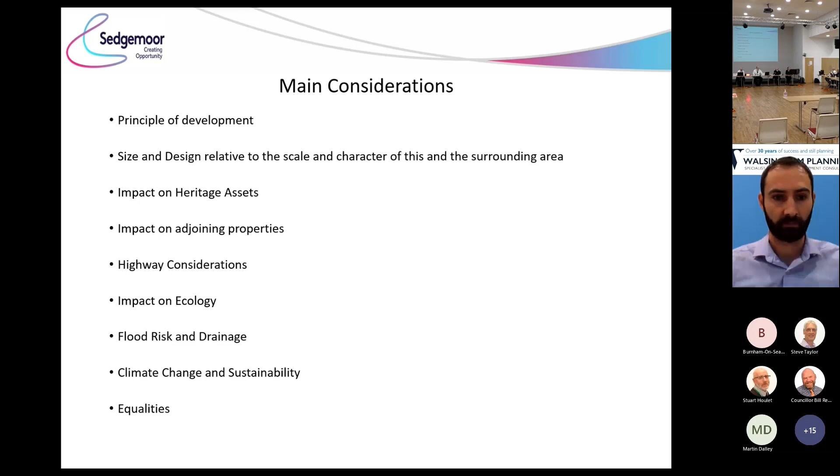So this slide shows the site outlined in red. It lies to the south of the existing primary school on New Road, to the east of Main Road, with New Road to the north and Main Road to the west. The site is located outside of, but adjoining, the settlement boundary for West Huntspill, which it adjoins on the north and west boundaries, and it is seeking consent for exceptional release through policy T3A of the local plan. So it's an outline application for up to 45 dwellings.

So this shows a Google Maps image of the site, which is square and level and clearly defined with hedged boundaries. There's also land drains surrounding the site and a bus stop on Main Road and a mile marker to the south of the existing bus stop, which is currently in the existing hedgerow.

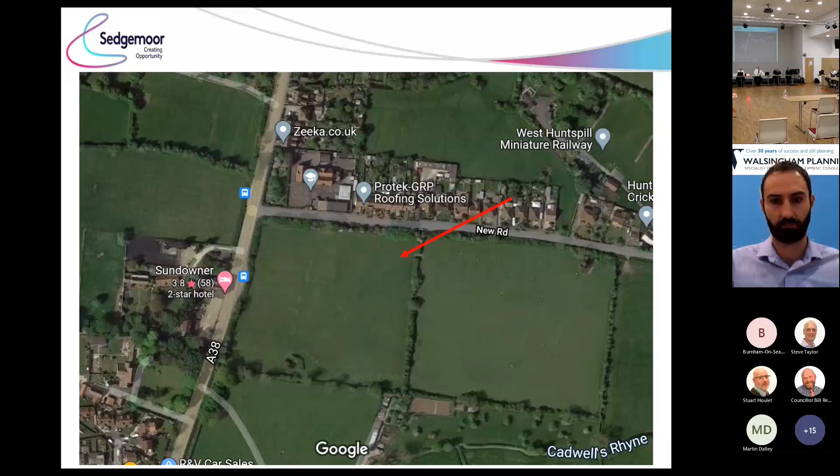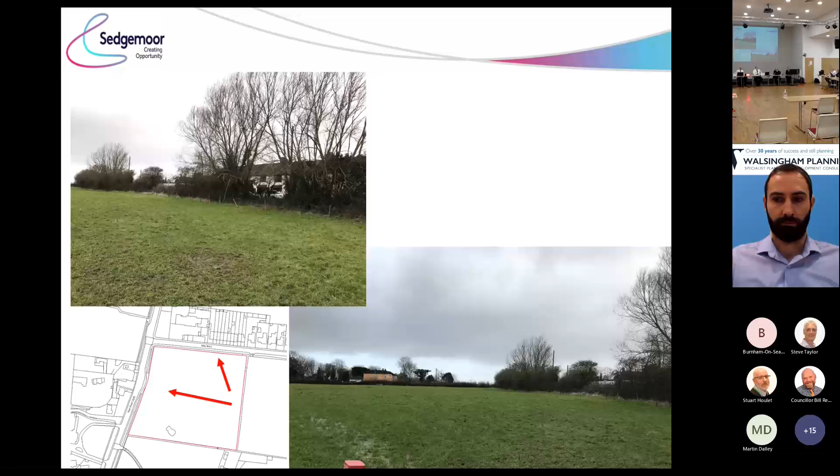So the next couple of slides show the site. The first image is from within the site looking northwest, with the existing screening to the boundary and properties on the opposite side of New Road visible through the hedge. The second image is a view through the site looking west, showing the elevation of Sundowner, which lies on the opposite side of Main Road.

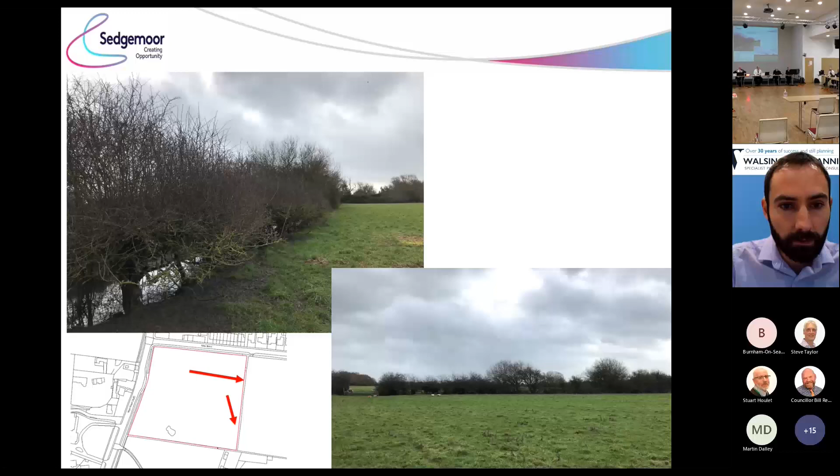These are views east and south from within the site, showing the level nature of the land and the established hedge boundaries to the site. The top image is a view to the southeast of the west boundary, and a view from within the site towards the west boundary with the existing field gate, which currently provides access for this land parcel.

This slide shows a view of the existing parking along New Road, looking west and then east, and the surrounding parking restrictions due to the location of the adjoining school.

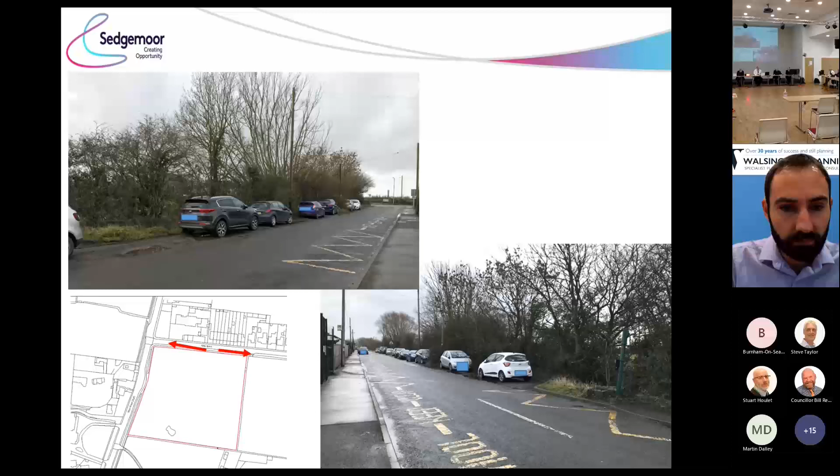As previously mentioned, the application is in outline and was supported with this illustrative layout. The only detailed matter for consideration is the access. This indicates there's a play space and a car park along the northern boundary. There's a pedestrian link into New Road at the top hand corner of the site, and maintained green boundaries and enhanced wildlife corridor along the southern boundary.

In principle and in accordance with policy T3A and S2 of the local plan, this site is looking to meet an identified local housing need for affordable housing, identified as part of a housing needs assessment for West Huntspill. In October 2019, the West Huntspill Housing Needs Assessment was produced and published, although this was subsequently updated in September 2020. Whilst the Parish Council have raised concern regarding the update, the Affordable Housing team have confirmed that the update was undertaken following a robust methodology and resulted in a housing affordable need for 18 households.

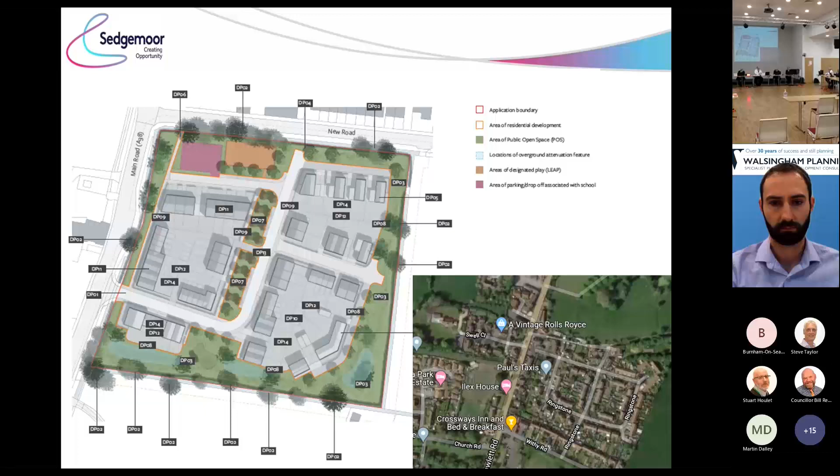Policy T3A, this is the criteria for the policy, which is also set out in the report, but for reasons set out in the previous slide, there's no objection in principle to the development of this land. The Parish Council have raised concern in terms of design quality and lack of reference to the recent NPPF changes, but as an outline application, the detailed design of the development would be subject to further applications and additional supporting information would be required at that stage.

The connectivity I will cover as part of the highway considerations. The siting of the affordable housing would be secured through the legal agreement and set as part of future applications. The Economic Development team have also recommended a condition requiring a local labour agreement, and due to the position of the site relative to the primary school, the developer also sets out the position of wider support for employment as a result of the development at this site.

There are a number of highway improvements proposed as part of the application, and the illustrative plan and the design principles plan set out green buffers to the boundaries. The creation of the access in the location proposed would also result in the opening up of the surrounding area around the mile marker.

This is a photo of the existing mile marker, which is currently located within the hedge on the western boundary of the site. It was not readily visible at the time I carried out my site visit. The bus stop is shown on the section adjoining the photo and shows the location of the access point. The milestone marker would remain on an area of green adjoining and to the south of the main access, and would fall within the visibility splay. That would result in the surrounding land around the mile marker being cleared to ensure visibility, increasing the prominence of this heritage asset. In terms of heritage impact, the development is not looking to move or relocate the marker, although the development would result in a change to its setting.

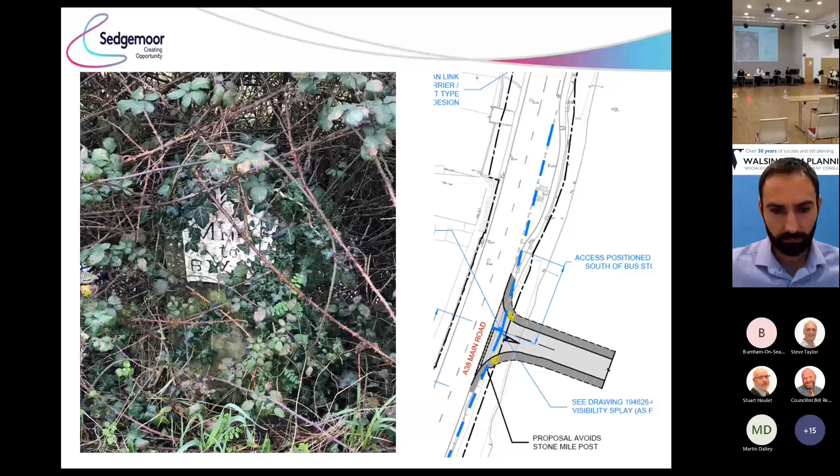Turning to impact on neighbours, there are residential properties adjoining the site to the north and west, with agricultural land to the east and south, and the school immediately to the north. The layout plans are only indicative because the details are set as part of future applications, but it does show landscape boundaries retained and a landscape buffer. The car park and play area would increase separation between the proposed development and the school, and the dwellings to the east, orientated to New Road, show a good degree of separation.

Properties are also shown fronting Main Road, although due to the orientation of Sundowner and the intervening highway, there's not considered to be any undue impact. The detailed layout and design would be subject to further applications, but there are no constraints that would suggest that the development would give rise to any undue impact.

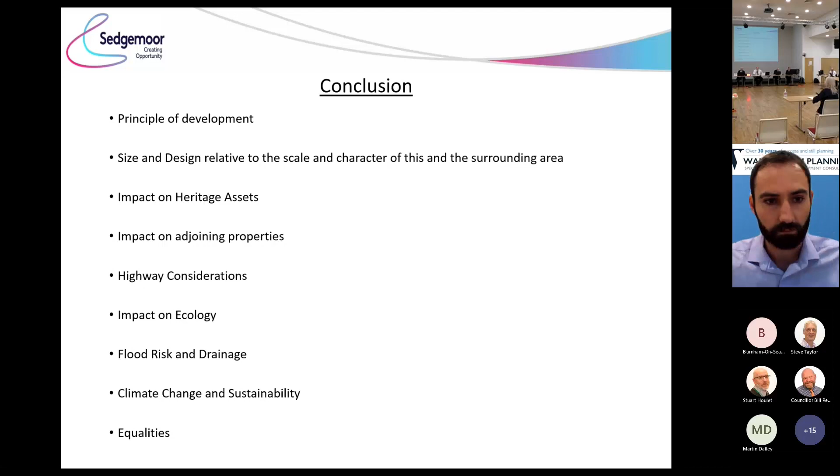I have lived in the village for the majority of my life, and I live at 5 New Road, and this development is totally out of keeping with the surroundings. I would like to say that we feel our democratic rights have been eroded by COVID restrictions. The majority of residents did not receive a consultation letter or any communication and are unaware of the development. However, 65 plus letters were submitted to the planning department.

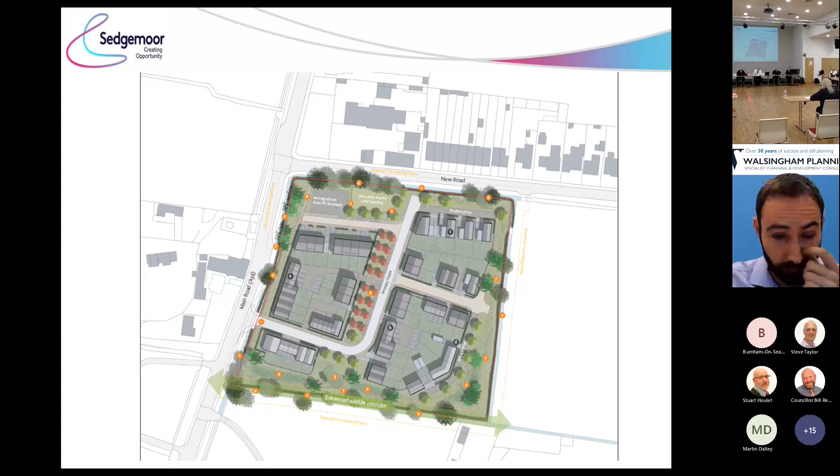Finally, there has been no consultation by Walsingham with us as claimed. Outline planning application was only received by the Parish Council on the 14th of January 2021, which has allowed the public just one Parish Council meeting on the 8th of February to discuss it. They have not worked closely with residents - paragraph 28 of NPPF - and finally, Sedgemoor local policy for Tier 3 housing has not been adhered to, as a meaningful and robust engagement with the local community and other stakeholders has not taken place. Thank you very much.

Ask councillors here and there, have they read our letters that we submitted? I'm sorry, I can't allow you to carry on. You've had the 3 minutes that you're permitted, but thank you.

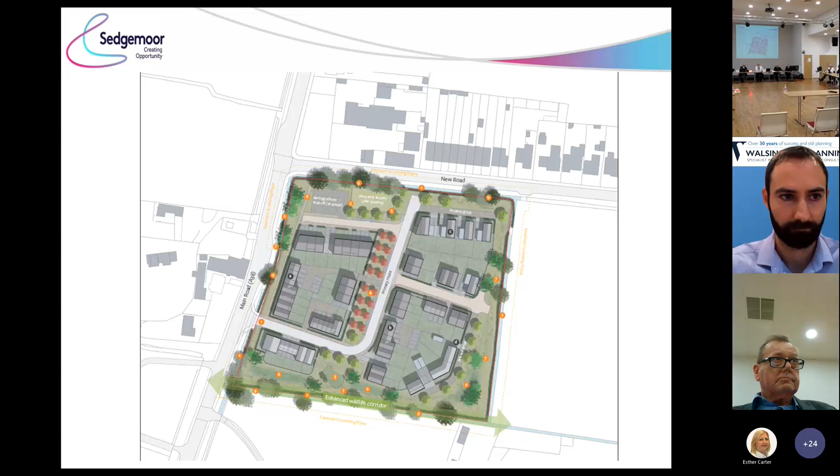Hi, Mr. Chick, I'm going to ask you to start, but give it 5 seconds before you do, just because we need to turn some mics off first. If you could count yourself to 5 and then start, we'll let you know if that works. Okay. Hi, Stuart.

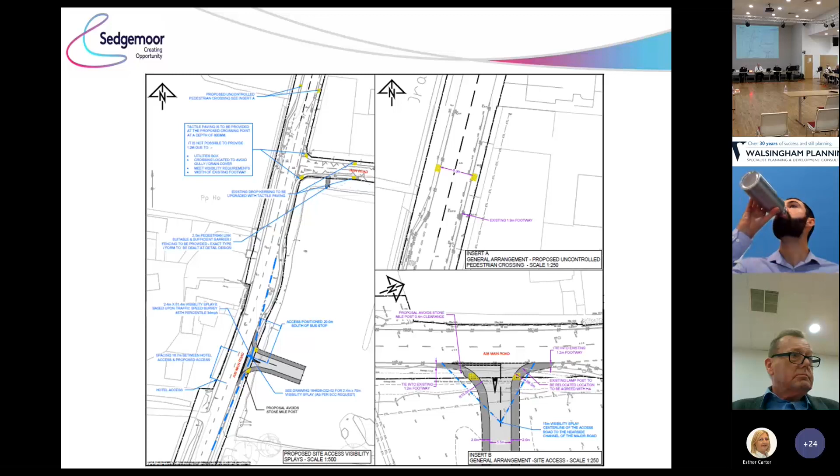It's quite difficult, and I'm very surprised that you have allowed this slightly enlarged development with only one access through to the A38, so that everybody has to come in through that road, with traffic and congestion problems for them to cope with. Personally, I am diametrically opposed to any large development—or this is a medium development, but in terms of West Huntspill, it's a large development. They're quite right in what they said. It's quite a large development.

I'm really surprised that you've allowed it right along the road, right next to the road. I would have thought this should be further inland, away from the road, so that it becomes something independent, with an independent access to New Road, for example.

Is it New Road? Is it New Road?

I am also disturbed about the fact that you are having traffic drive every morning and every night through, disturbing the peace of these people. This is not a peaceful development. People who will be getting houses on this development are walking straight into a problem, with traffic that has a right to come through their so-called peaceful development. I've had it described as an advantage, but I don't think it's an advantage at all. I think it's in the wrong position, and in some respects overbearing to the village.

One of the speakers said this is mainly a single and small housing development. If you drive along this road, you see lots of single houses tucked away nicely as part of a ribbon development. This village is a ribbon development, not somewhere you clump large amounts like this. Personally, I will be voting against this because I think it's in the wrong place. You could say it's overbearing to the road - it's hardly overbearing in terms of size, but for a large development like this, it's in the wrong place. It's misplaced.

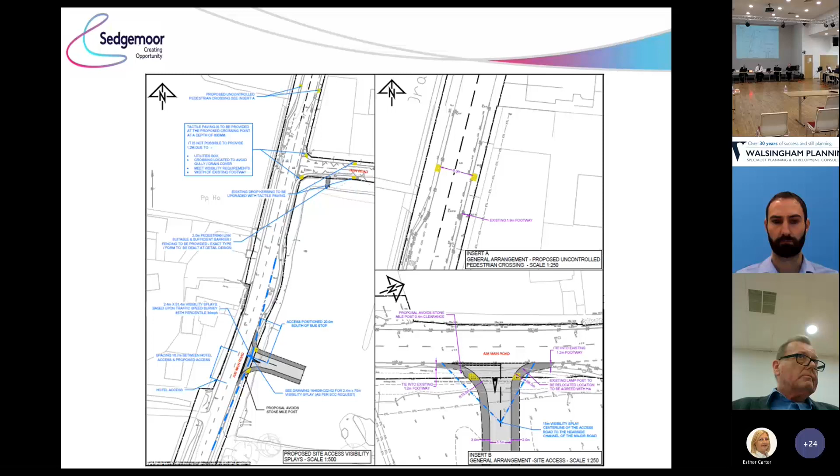And where would the crossing patrol be operating - on the A38 or New Road? The primary school currently operate a pedestrian crossing on the new road section, but that's run by the primary school because of the school. So it's not something that's provided by this development.

Okay, thank you. Councillor Pearce? Not yet, I'll try again. Can you hear me now? No. Not sure, I think we got you then. All right, okay, thank you.

These applications, I think, always place us in a difficult position because it meets policy requirements, it ticks boxes, and it includes affordable housing. And we all want to see more affordable housing, but I do have some concerns about this one.

I would like some more detail on the form of the affordable housing, what form that will take, how we define that. In terms of Tier 3 settlements, our policy 5.172 says that it's generally expected that such schemes will be community-led. The speakers today have not implied that that is the case, so I would like to know exactly how the developer or the applicant has engaged with the community.

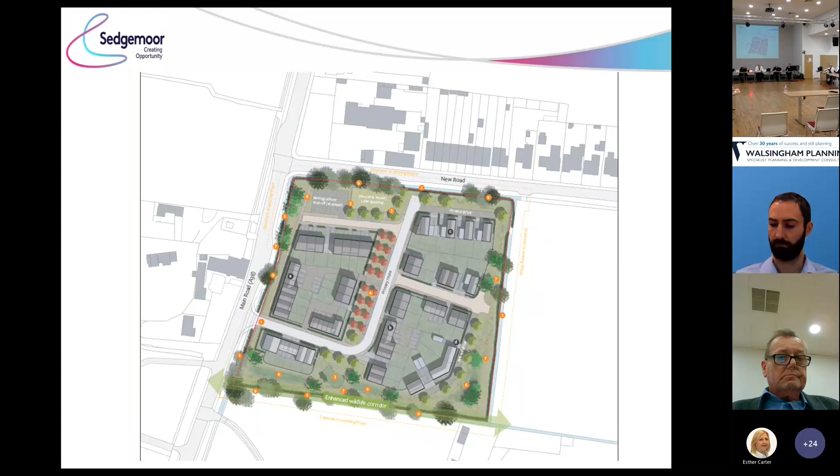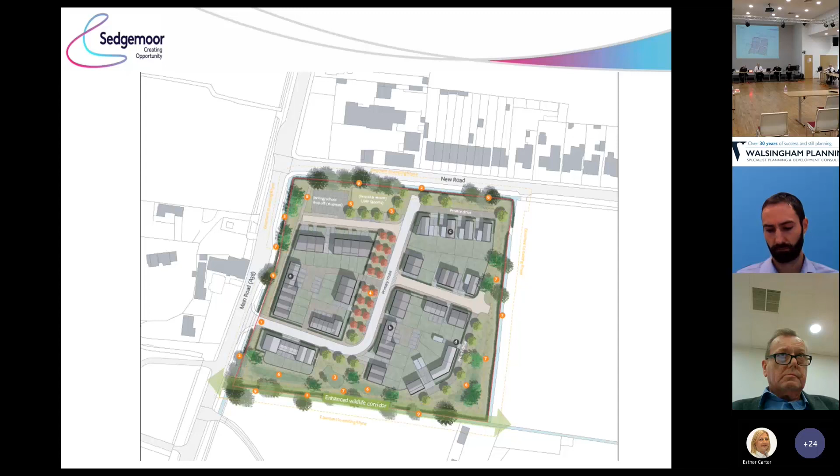It was alluded to by one of the speakers, but with no details, and there does seem to be a disparity there. I am concerned about the fact that it's in flood zone 3A, and page 54 of the report states that the ground here has poor drainage, and I'm not sure that building them half a metre higher than the ground level really addresses the flood risk problem for the surrounding area, other than the development itself. So I do have concerns about this, and although we want to see affordable housing, I'm not sure that it's at any price. Thank you.

Mrs. De Vries? Thank you.

In terms of community consultation, the site was subject to pre-application advice, and they did consult at pre-application stage with the parish council. You heard from the agent this morning there was also a leaflet drop, although how extensive that was and how far it went, I'm not sure. As part of the planning application, there was a site notice posted on site, and the residential properties immediately adjoining the site would have received a neighbour notification letter. So that's the engagement as part of the application.

In terms of flood zone 3, because it's meeting a locally identified need for West Huntspill, the search area for other sites at lower flood risk is West Huntspill or the immediate surrounding area. All of the immediate surrounding area is also flood zone 3, so there's no area at less risk than this site.

In terms of drainage, the reference was because the lead local flood authority normally encourages more sustainable drainage systems for infiltration, but because the site is surrounded by land drains, they're penned at a set level in accordance with the IDB. So the likelihood of acceptable infiltration rates is slim, which is where the drainage comment came in, because it's unlikely that they would drain it in the way the LLFA would originally want, but they accept that argument in principle. So there are alternative ways to drain it, but slightly less sustainable. That was because of the surrounding land drains rather than the flood risk.

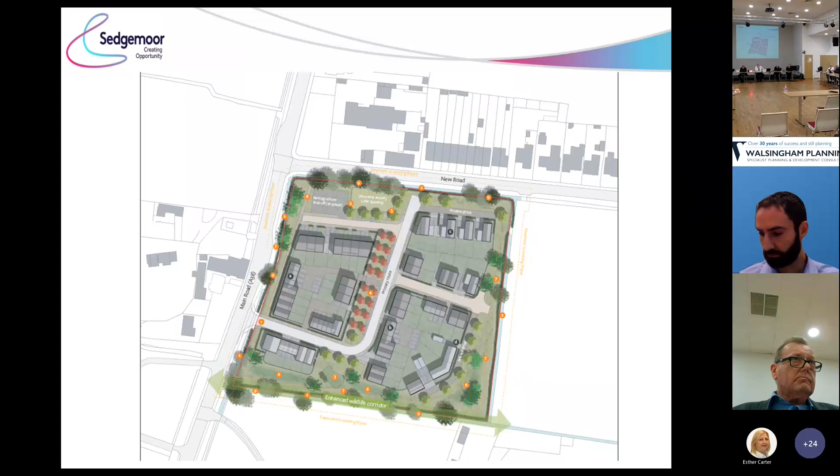Well, I suppose the housing needs survey is only a snapshot in time, isn't it, in 2020? So it wouldn't have had that updated information. But of course, as I said, there were 50 people originally in 2020 identified on the Home Finder Somerset list, of which, when they've done the targeted interviews on the phone and emails, other people have come forward. It doesn't mean that those people who still haven't come forward aren't in need. So with these things, it is always a snapshot in time.

The one thing we all know, because we have this discussion on these applications all the time, is once need is established and built, the need goes up. People will bring themselves forward to say, actually, we are in housing need. So the need goes up, it doesn't go down. There isn't a magic bullet for this issue in terms of it being part of the housing crisis. So housing need will go up. The housing needs survey is meant to be a piece of evidence to underpin an application going forward. It's a snapshot in time.

The figures that the housing need assessment at that time was identifying was 18. This application comes in and fulfills that. If there's movement around the margins of that, I don't know, I haven't got that information to hand. But there will always be a bit of a buffer in this because housing need is out there and is usually above the levels the survey identifies. So I think it's a safe and robust position, and one that we've taken at Wedmore, Woolavington recently, on all those other schemes. So we're being consistent.

I think it's probably a bit unfortunate that it was called a light touch housing needs assessment, because if it'd been called targeted, it would have been seen as something a bit more robust. But that's what it was, a targeted exercise. Possibly a learning point would be it would have been helpful to have had that housing needs assessment there so that we could read it rather than read the officer's comment on the housing needs. Looking at primary evidence is always more helpful than looking at secondary evidence.

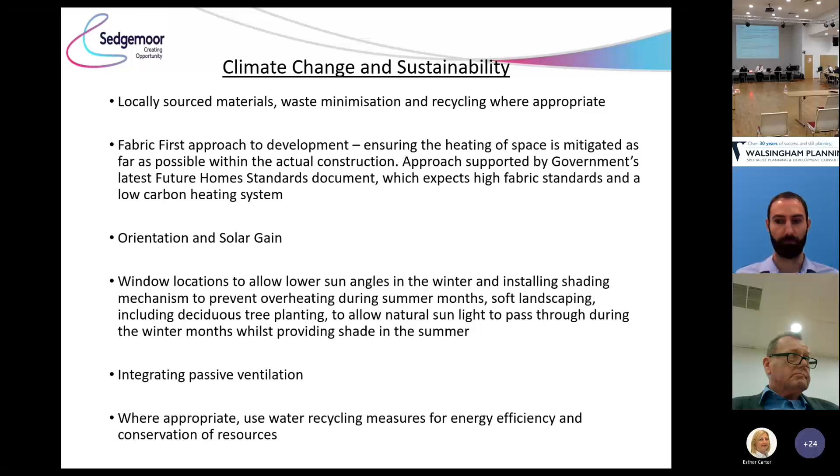Going back to the crossing thing, a tactile crossing isn't an officially recognised road crossing. There's no requirement for a car to stop with somebody waiting at the pavement. That's why I was concerned when they were saying a crossing on the A38 - which I think is a good thing for a development like this - has got to have some sort of control on it.

With regards to county education, they've said school places generated. I'm not sure of the age group of that adjacent school, but is there sufficient places in that school to accommodate them, or are we going to have people having to travel to other schools? Bearing in mind we've got probably over 1,000 houses at least being built in that immediate vicinity.

Currently, we haven't got any objection from education in terms of capacity. We're happy that there is currently spaces available, but they rerun the figures in terms of what capacity they've got almost annually and calculate it on an annual basis. At the moment, the comment we had back from county education doesn't suggest any capacity issues.

So basically it's first come, first serve - whoever gets in first will get it. It isn't taking into account the whole picture of all the housing that's going to be there.

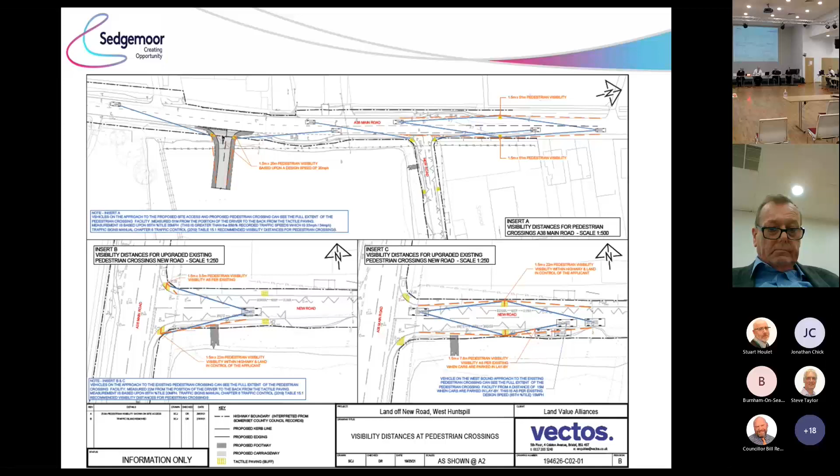In terms of accommodating additional spaces, the comment we get from county education does require contributions through the Community Infrastructure Levy. So there is a charge per school place which they will subsequently collect from the CIL pot - that's their comment outlining what contribution they would take from the development to accommodate any additional spaces if needed.

So there is sufficient room on the existing school site to actually put up further accommodation should that be needed. That's the comment we've got - we haven't got an objection on capacity.

There is, of course, the new school at Brue Farm. Yeah, that's part of that as well - that's what I was saying about the age groups. I'm not sure if one's at a lesser age group then goes up to the newer school, or whether the newer school is going to take on all the age groups. Both primary. Both primary. Thank you.

Yeah. Okay. Councillor Murphy, can you pass? Thanks.

It's just a question on clarification. I was very interested to see when you wrote about solar gain, it mentions a shading mechanism - what is that? It'll be subject to detailed design, but it could be like an overhang of a window, so you don't get the direct glare of the sunshine. So you've no detail of that? No, it's an outline application at this stage - there's no detail of any of that.

Thank you very much. Just I don't want to hold things up. Okay.

Any further comments or questions from members? At the moment then I have a proposal, which was to grant permission with the amended condition 1 and the local lettings policy highlighted. Is that seconded? Councillor Kingham? Okay.

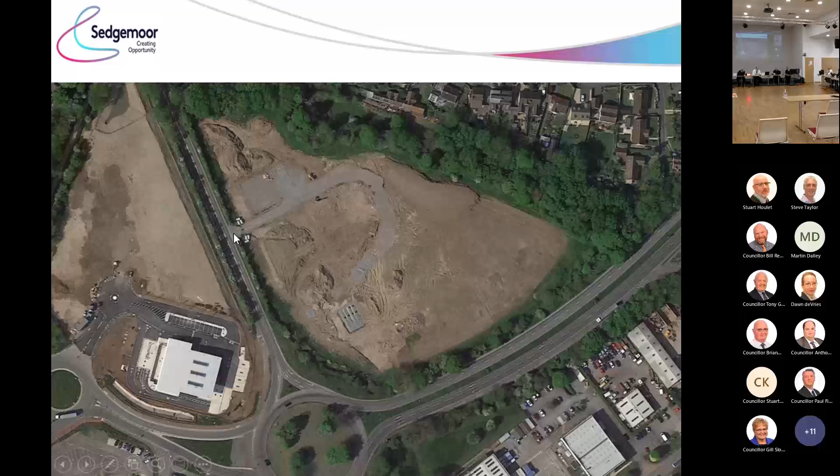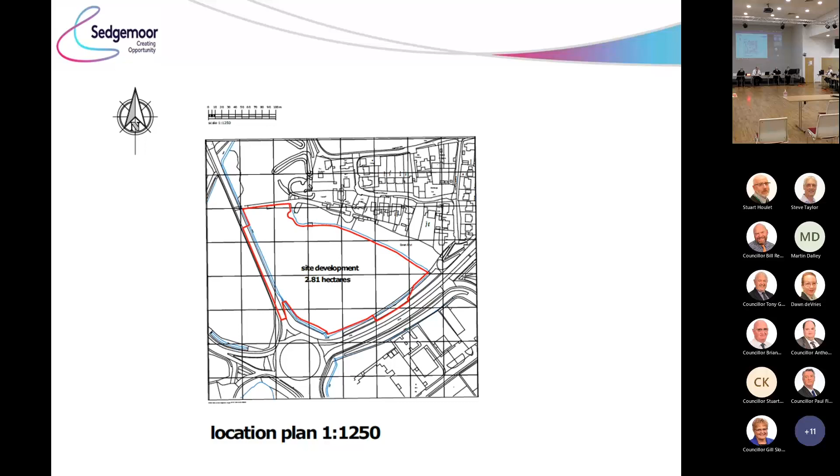You can see the A39 coming down the dual carriageway to the Dunball roundabout. A bit closer in, you can see the basic layout starting to take form, and the construction entrance in the position of the approved final entrance, operational during construction, based on the A38. The red line shows that it includes the development site as well as works on the A38 outside the site, and then, as you see here, just on the A38 line, the red line kicks out to show the entrance, where it would be as a slip road off the eastbound A38.

In terms of the mix, the detailed permission is on the southern part of the site, and on the northern part, the three little coloured shaded areas are the parts with outline permission installed. At this point, for that outline element, only the points of access are to be agreed now; the remainder will come with the reserved matters on that northern part of the site. We have all the details on the southern part of the site as well.

So in detail, we have the entrance on the left-hand side there from the A38 coming in through the site, with a spur off north to serve the outline. There is a development site just in here, just to the south of the entrance road, but that's not part of the detail today.

The area down the southern part of the site provides a petrol filling station on the western front, with the shop, the fueling area for cars to the south, and an HGV fueling area to the western end. There are some jet washes on the southern part of the site, and then two freestanding buildings that are built there - one is badged up as a Starbucks, the other as a Kentucky Fried Chicken.

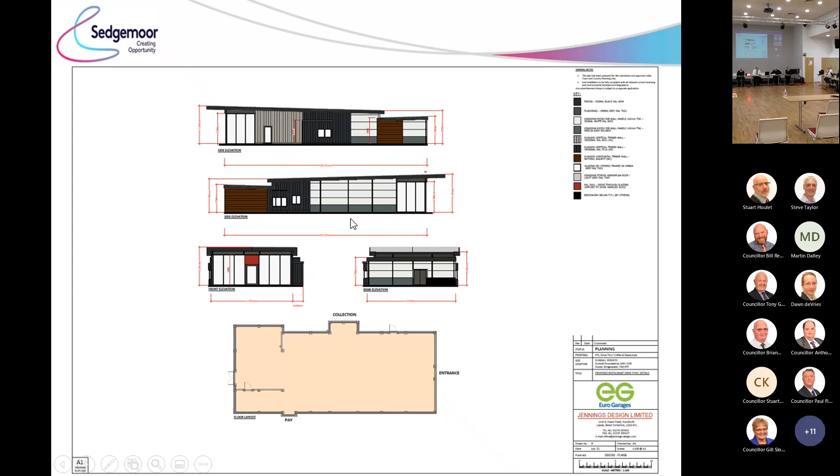Drive-through out there. And then the other takeaway - this is the one badged up as Kentucky Fried Chicken. The elevation you see from the A39, from the side, is essentially this middle one here.

Just reminding us of the layout, and moving on to some elevations in context - these are essentially read as a sequence of drawings looking north, starting with this area here, which is the HGV fueling area.

Moving on to the petrol filling station, and then as though you're viewing from the south, the side of the coffee outlet, and continuing on the next drawing down with the side of the other drive-through unit, Kentucky Fried Chicken. Then there's just a cross-section in the side, looking from the west through the site - so it's all single-story, relatively low buildings.

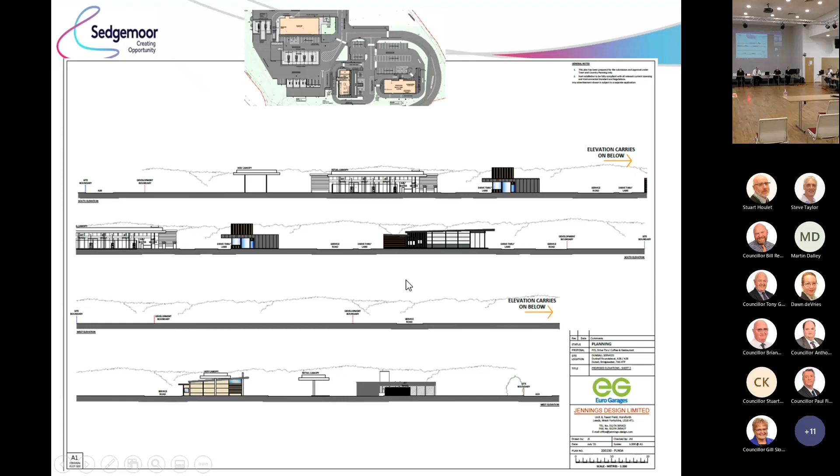And then the corresponding rear elevations from within the site, looking south, showing the backs of these buildings. In terms of internal arrangements, the whole site has been tracked for HGVs - all the vehicles likely to use it, including all the servicing and vehicles arriving at the petrol filling station to fuel up - and that's all been shown to work through the tracking drawing.

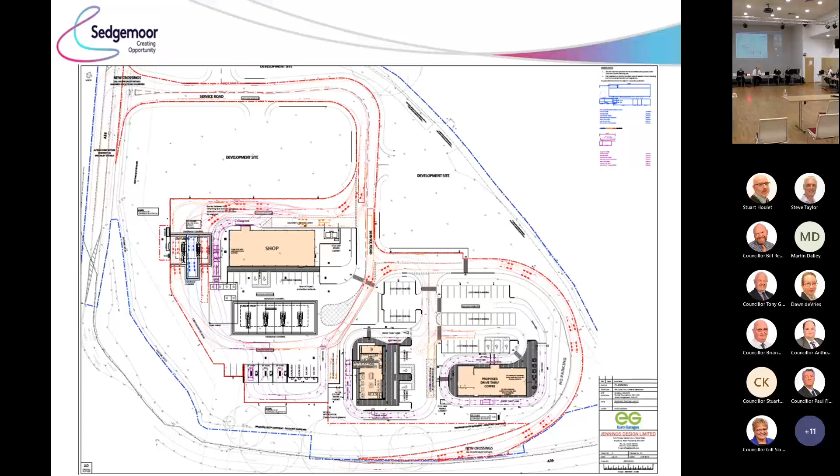This layout hasn't changed since the previous grant of permission. So we're only looking here at whether or not this layout would be safe to work without that A39 entrance at the bottom for the first 6 months - purely the first 6 months of this detailed permission.

Some site views of the site. This is from the A39 looking into the site, courtesy of Google Earth.

A couple of months ago here, you can see things under construction. You can see the frame of the canopy for the petrol filling station on the left-hand side, the side of the Starbucks building, and then behind the trees there, that will be the Kentucky Fried Chicken outlet.

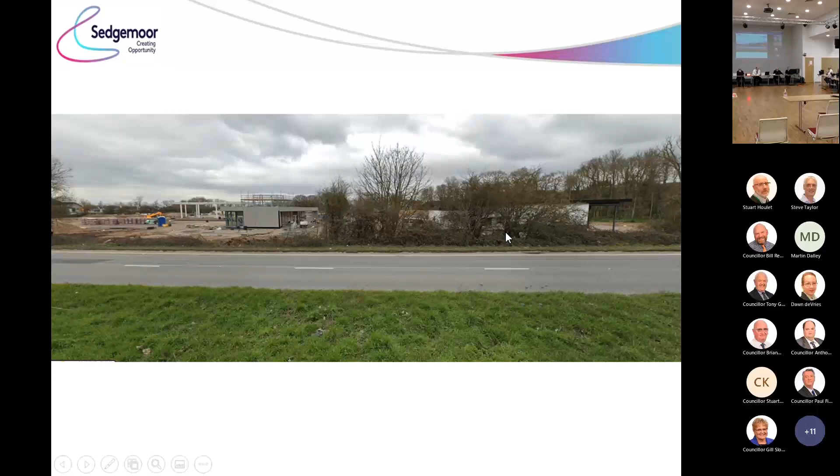From more up-to-date photographs, that is the site as we see today. It's essentially built out, but appears to have been mothballed. There was no one on site working when I went there yesterday.

They are having difficulties sorting out the access arrangements with county highways through their section 278 agreements. Those agreements would flow from the grant of permission if we are minded to approve this today, because they wait for the planning permission to be in place before they finalise the 278 agreements.

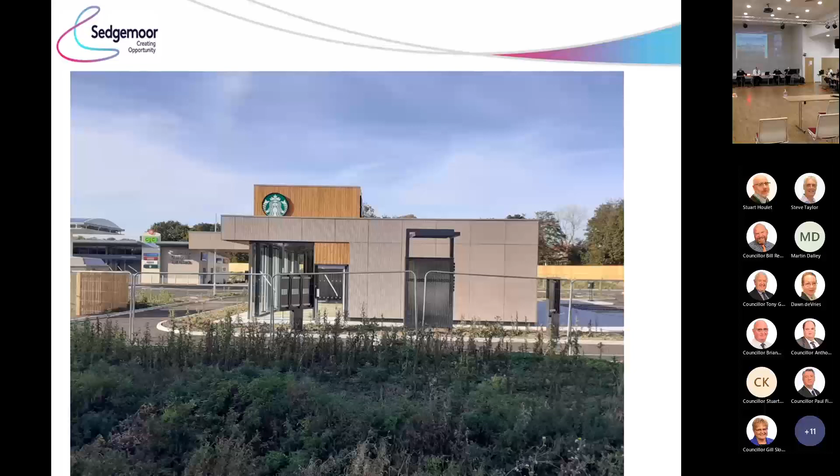Just panning the camera around, you can see it's all badged up, so we're pretty clear who the operators will be. And then there's the last building there.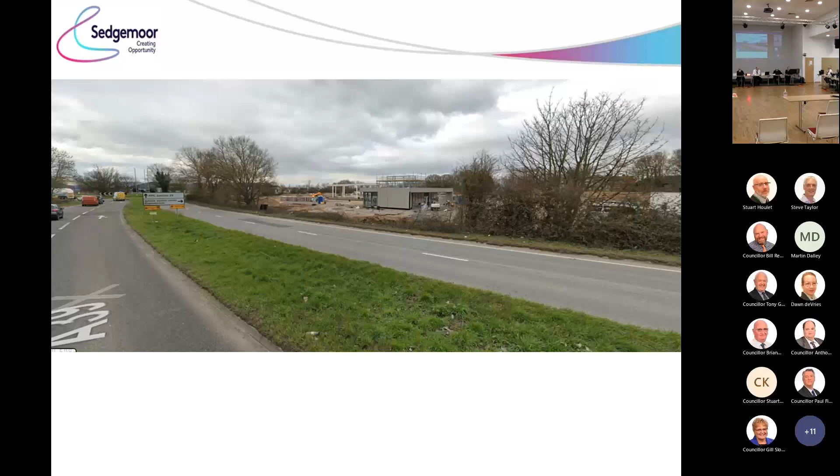Sweeping around the back of that building, and from the roundabout, looking at the site, most of the site boundary treatments have been retained. They've been thinned out a bit, but that is all part due to be retained. The boundary treatment planting around the site will be retained as part of this scheme.

Going up again, courtesy of the same source, during the construction phase that's the end of the A38, and that's how it is today. So you see the boundary treatments have largely survived.

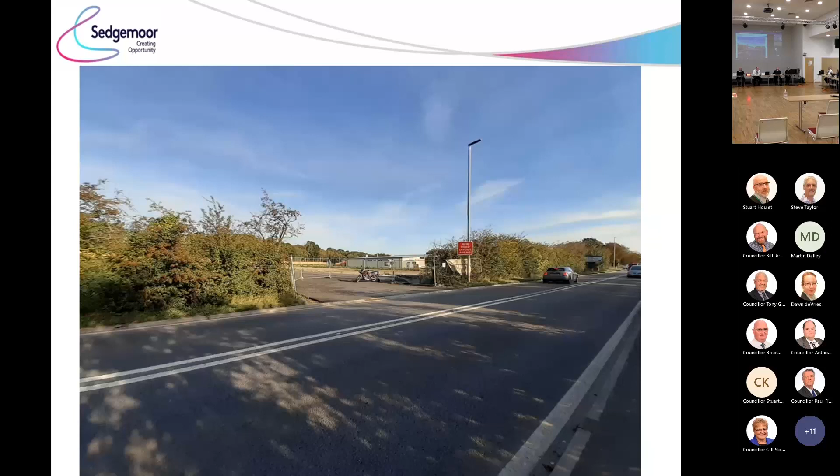There's really a structure immediately inside that, and that's according to the 278 agreement, bridging that. Then looking inside through that entrance, that will be the road taking you in, round up towards the back, round to the right, taking you to the petrol filling station area.

Left-hand side up would be the employment units. You can see the acoustic fence that has gone in at the back, that structure all the way along, visible all the way around that side of the site, to provide a degree of noise protection to the properties down there.

That has been done in accordance with details already agreed with the discharge conditions, and I bring those forward in my recommendation today. Just looking at the employment site again, to show that fence does go all the way around.

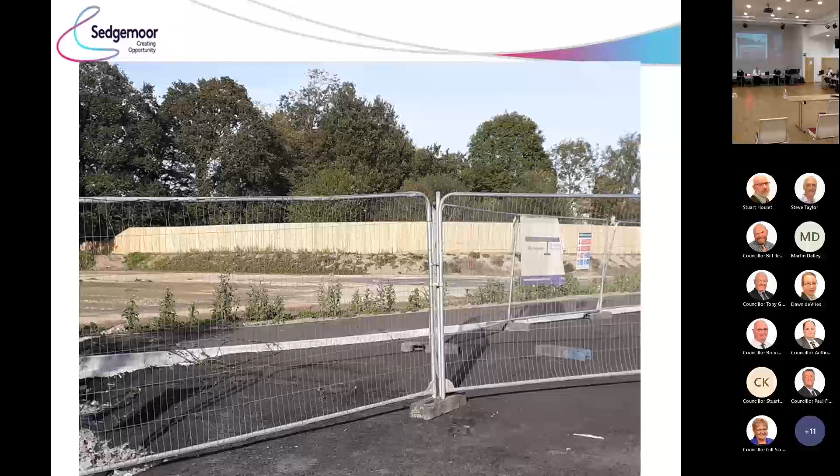Looking at the backs of the buildings, that's the back of the filling station building. You can see the little collection on the right-hand side, and then a bit more in context. That's the HGV filling bit.

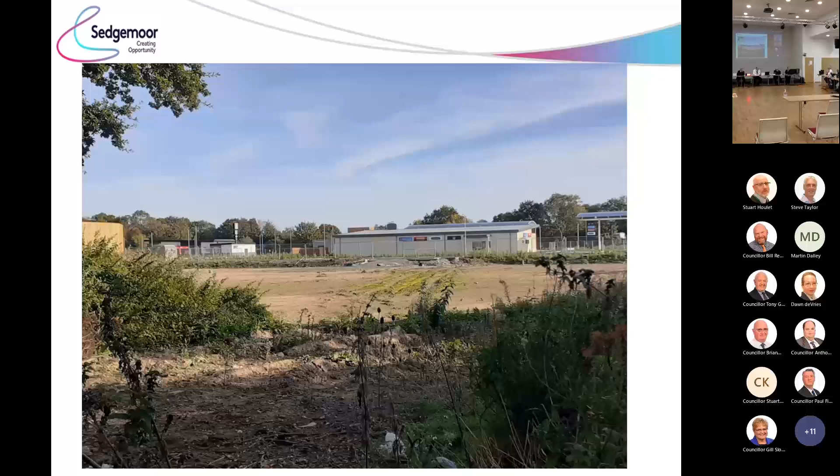Finally, right up in the corner, this is the road that comes out from down there onto the A38. I stepped inside there and took this photo, looking down from across the land down to this, looking at it in detail.

In terms of conditions, a couple of updates. Firstly, I've structured the permission to read as a full detailed permission. For the first part, conditions 1 to 23, it's a detailed permission that almost exists as a standalone in terms of condition discharge. Conditions 24 through to 47 are the elements that apply to outline.

I'd suggest we insert on the decision, in front of condition 24, just a heading to say these are conditions that relate to the outline. It does mean some duplication, but it means each condition only needs to be discharged once. Where conditions apply at both the full and outline level, you'd have to discharge the same condition twice, which can get confusing. I feel it's just easier to structure it like this.

In terms of condition 28, I've realised that the structure of that in the report would effectively allow the outline to operate for 6 months using just the A38. That is not the intention - the outline is always clear that it must be served by both entrances. So I'm suggesting we redraft 28 and set out the elements to make clear that the outline can only be served by both entrances.

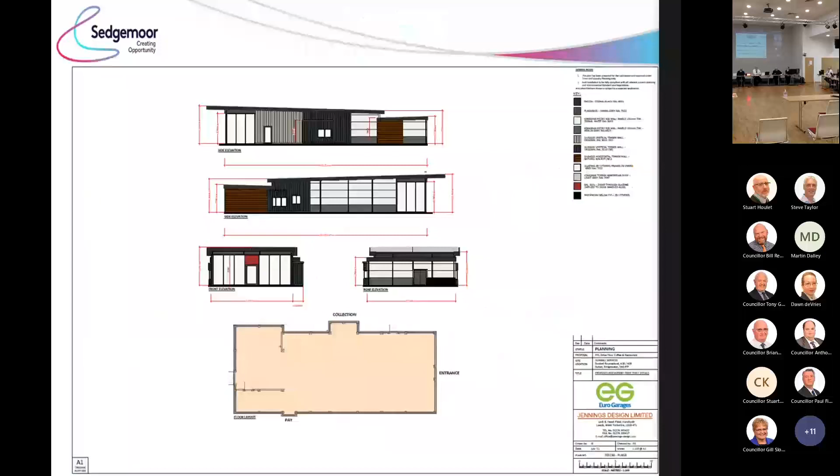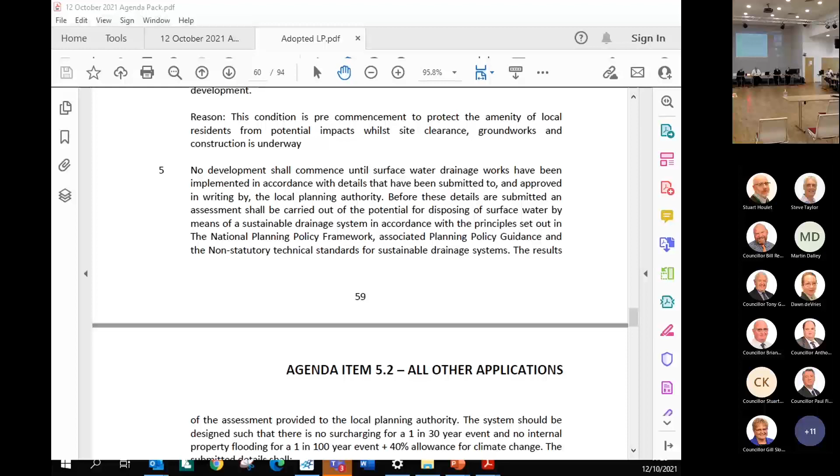Thank you, Chairman. In general, I don't have a problem with this application, but I have concerns over the amount of applications after granting permission. They keep coming back with these variations. It makes you ask, would we have given permission had these variations been put in the first place? We get this far too often, and to try and tell me they want to change the opening hours after the event and hadn't thought of that before—sorry, I don't buy that. So although in general I'm not against this, I am getting concerned and fed up over the amount of applications like this coming in.

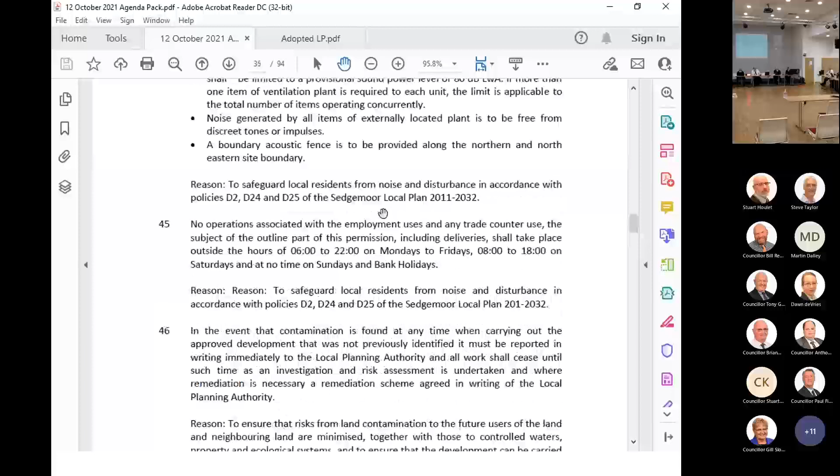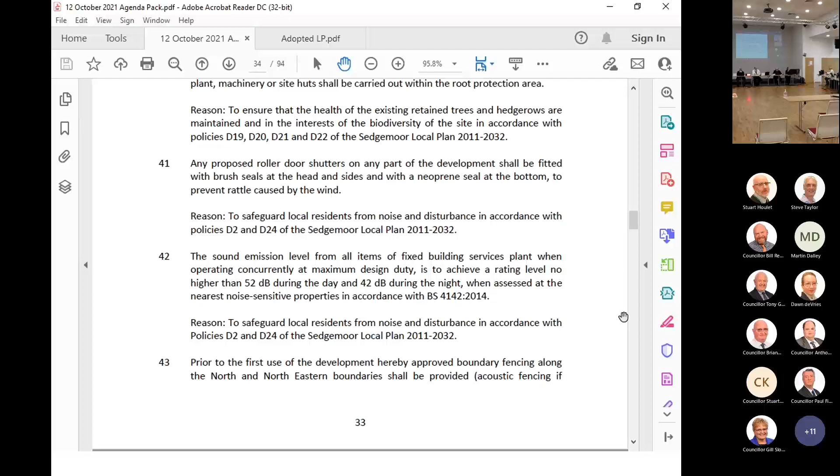Yeah, so I think at the nearest noise sensitive point, that would be at the boundary of it, it's not within. Probably that British standard document will set out how and where that is done. So that is a condition being brought forward from the previous consent, unchanged. This particular one is relating, unfortunately, to the outline element, so any plant or air conditioning installed on that bit of the site - I think there's an equivalent condition in relation to the petrol filling station. So we're saying it's not inside the building, it's at the boundary of the property.

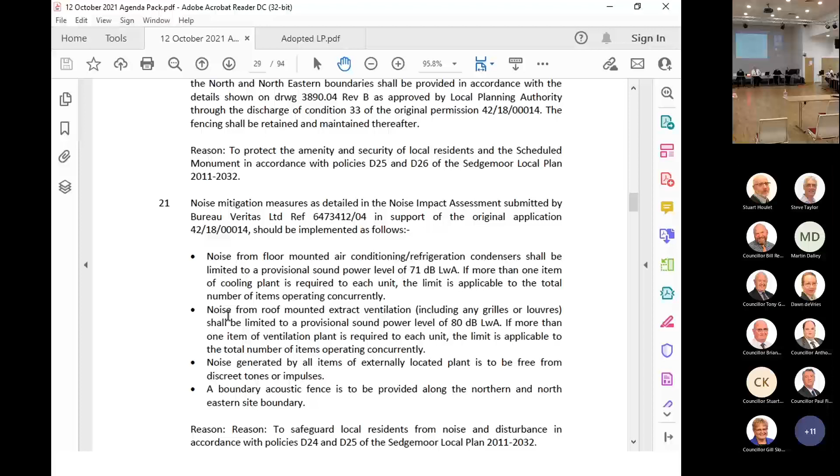Thank you. Yeah, our previous speakers have raised concerns that I was going to raise over the legal issues. I really don't share your optimism that this could be resolved in months - legal issues can take years, so I am really concerned about the temporary access dragging on and on, and the impact that could have.

I just wonder why there's a justification for another petrol station when there is one across the road, especially given the supply problems, you know, that could see queues of traffic on both sides of the road.

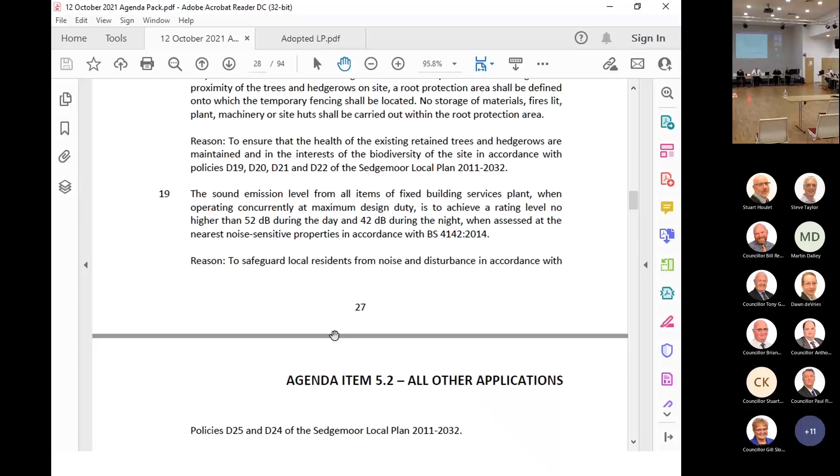So the other issue I have is just regarding the climate change elements, at the risk of being the ranty person that always raises the climate change stuff. It mentions policy S5 within the list of policies within the plan, but I can't see it anywhere within the report, and it would be hard to understand how it could be in there, but it seems to have dropped off unless I've missed it. So I would like to have some sort of reasoning around how this meets our climate change requirements, please.

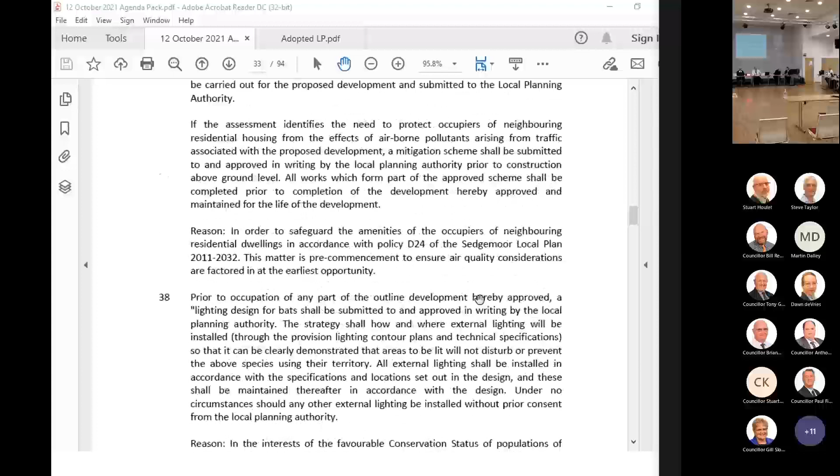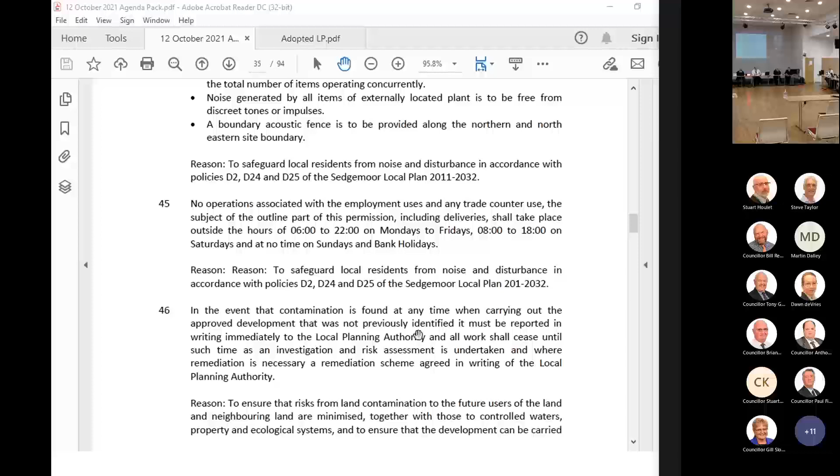There is a condition I was just looking through, a requirement I have brought forward from the previous permission regarding the provision of car charging points within the development. I believe it's condition 9, on the full part of the scheme. So yes, I think petrol filling stations should also include electric car charging. I think we'll make that a condition. In terms of the nature of the development we are proposing here, that is probably as far as we can go regarding climate change sustainability requirements.

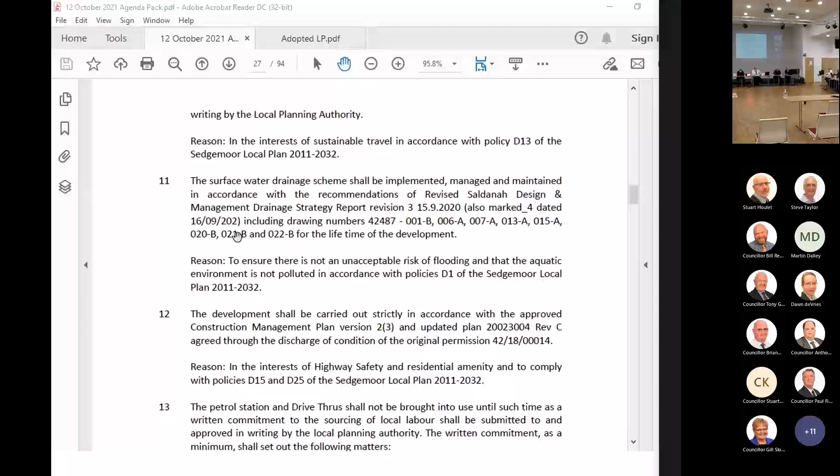Thank you, Mrs. deVries, I think you wanted to comment. Yeah, just in terms of the detailed element, we have got conditions for cycling and pedestrian links. So as part of trying to encourage more sustainable transport methods, we have got the electric car charging points, as Adrian's already set out.

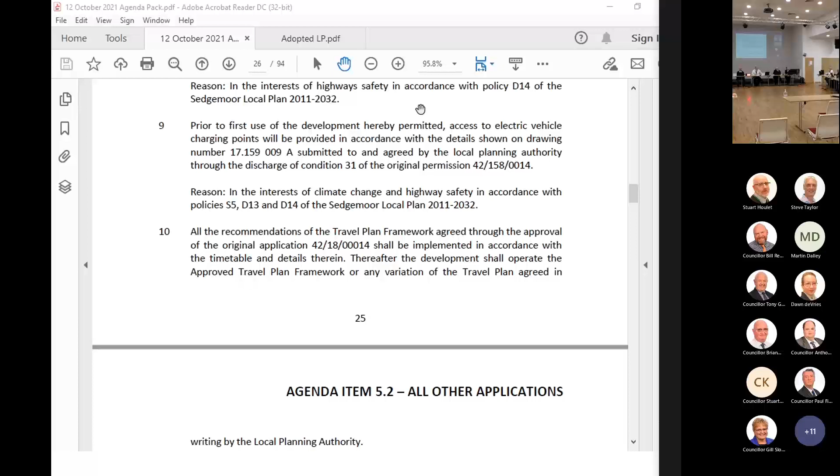In terms of the outline element, on a number of major housing schemes we condition sustainability statements so that when they submit any approval of reserved matters, they outline what sustainability measures have been incorporated as part of the construction. So given the outline conditions subject to approval at this meeting, if members were so minded, they could add a condition requiring the sustainability statement to be submitted and approved as part of the approval of reserved matters, to consider how sustainability is factored into the construction of any further consents on the site.

Thank you. Councillor Scott. Two points really. Firstly, the entrance onto the A38, I can't really remember from the original plan, is that intended to be two-way traffic, or was it one way from the onset? I haven't really got an issue with this six-month problem, it seems to be a technical issue that hopefully will be resolved within the six months. The other thing is, when was the development going to be opened anyway? Is it in the next month or so, or is that going to take a while to open? Because it doesn't look particularly finished at the moment.

The other thing is just to confirm the hours of opening of the drive-through area. I'm a bit confused because presumably it's just to rectify the Saturday evening going up to say 22 hours and being open on Sundays and bank holidays within that time frame. But could you confirm what the Class B opening time would be, or delivery time would be? Would that be the same, or is that going to be restricted?

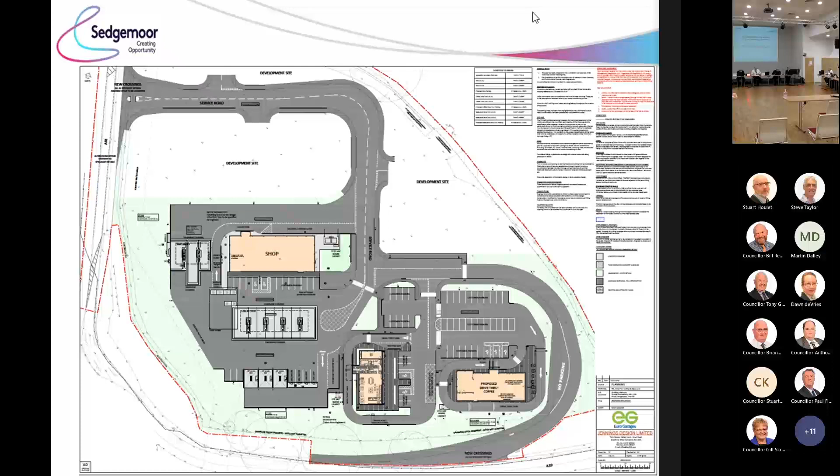Okay, are there any further comments or questions that members have? No, okay, so the recommendation is to grant permission subject to the amended conditions as outlined by Mr. Noon, and also the addition of a sustainability condition for the reserved matters part that will come forward in due course. If members are clear on that, all in favour of granting permission, please show. That's unanimously carried, so permission is granted.

Right, members, that brings us to the next application where we have a speaker present, and we're on page 67. 36 Burnham Road, Highbridge. Is it - it's me. It's Mrs. DeVries, you're presenting this. Thanks very much.

Right, thank you very much. This is an application that members saw last time, so it's 36 Burnham Road in Highbridge. It's a partly retrospective consent for formation of a new driveway and drop curb to the front of the property, and it's partially retrospective because they've done some of the building works to one of the walls on the front. The application is before members because the recommendation is contrary to the Town Council's view. They're objecting due to concerns relating to highway safety matters, which are detailed in the report. The application was reported to committee last month and was deferred to allow dimensions to be considered regarding a bus stop and proximity to the proposed access, and to seek further highway information and comments on the proposal.

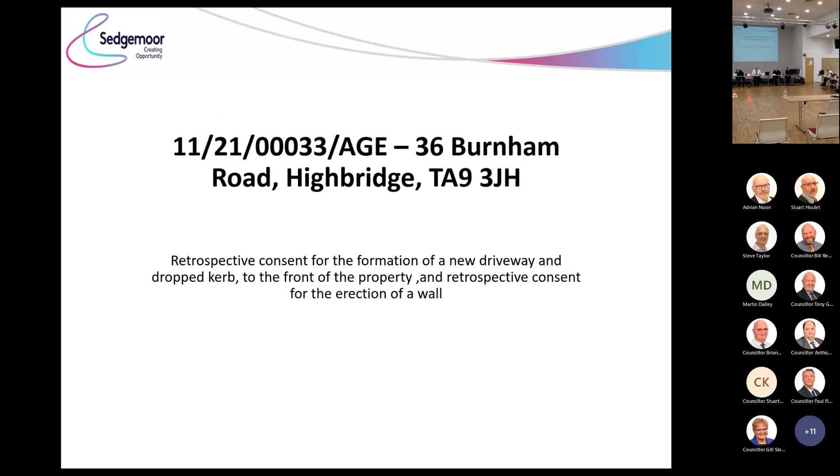So additional information has been submitted to officers since the last hearing at committee, showing tracking plans to make sure vehicles can get in and out of the access, and further comments have been received from County Highways, which I will come onto as part of the presentation. This slide lists the relevant policies from the local plan and the neighbourhood plan for the area. The main considerations of the application are impacts on visual and residential amenities, highway safety, flood risk and the historic environment. The reason the application was deferred, as previously mentioned, was highway safety concerns from the panel.

The application site lies within the town of Highbridge to the north of Burnham Road, and it's a B classified road, so there should be turning provided within the site to enable any new vehicle accesses to allow vehicles to get in and out in a forward gear.

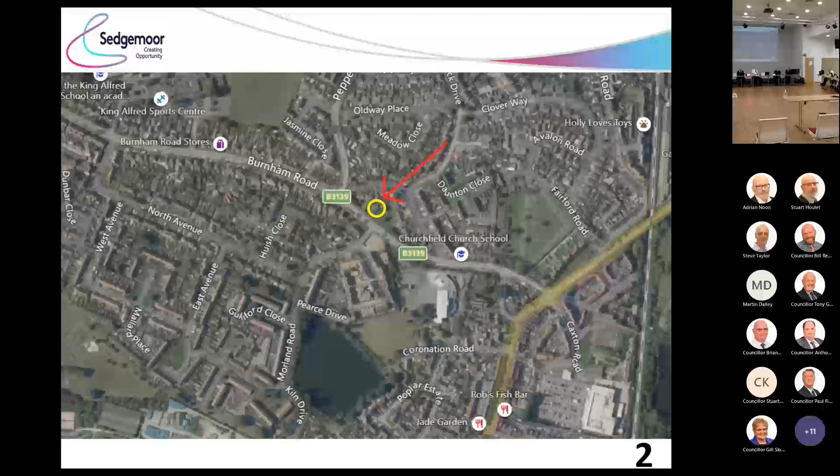The application seeks retrospective consent for the creation of the access onto Burnham Road and the erection of a rendered wall to the front. The site currently benefits from a vehicle access to the rear, accessed through Old Burnham Road. The access is proposed to be tarmacked, and a gravel parking area is also proposed to be created. A section of tarmac would then be placed on the existing grass verge, allowing access to the pavement and then onto the highway. The wall is specified to be 1.65 metres high, finished in render with coping stones to the top, and as previously mentioned, it's partially retrospective, so site photos currently detail a blockwork wall. The existing rear access provides one parking space, and it was the applicant's intention to increase parking provision for the property.

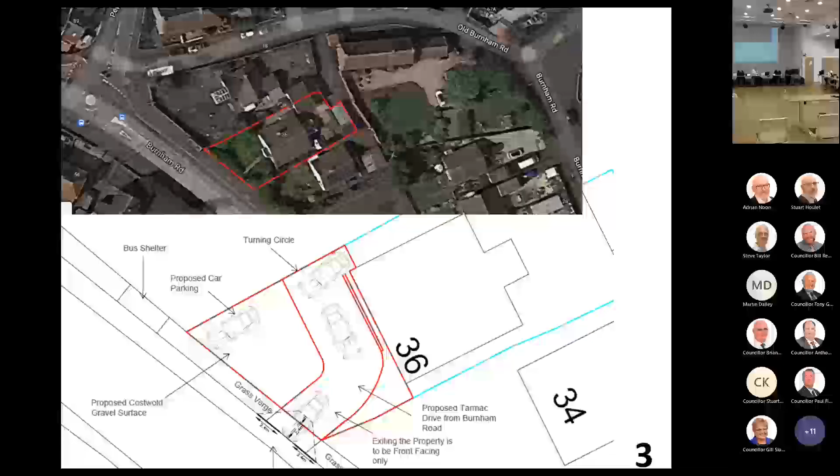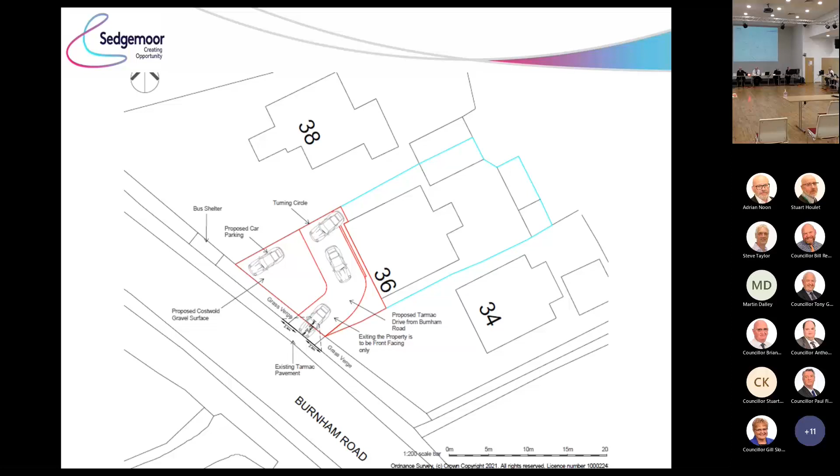Being Burnham and Highbridge, I followed this case quite intently. When this first came before us, I was absolutely steadfast against it. Since then, things have moved on. As I said, I followed it quite closely, and I've actually turned 180 degrees, I think, on this one.

There is a tactile crossing, I think, that has to be moved. Is that correct? Am I right in saying that? And is it a BT box as well? I think something has to be moved. Just a question about that, who actually pays towards that? Does the owner of the property have to contribute towards that, or is that just down to BT and the council for moving the tactile? Who actually funds all this?

Mrs. DeVries, do you know? It's a licensing requirement that they have to go through county highways. I'm not sure what the fee process is for licenses at highways. There'll definitely be a fee for the licence, I don't know how much they have to contribute, but I just wondered who actually coughs up for that. Is it down to the council just because? Anyway, it's not that important.

The visual distance, when I first looked at this case, I really thought that's not possible, cannot be. Since then, I've actually walked from the co-op down the opposite side of the road to have a good look myself, and it's not as bad actually as I first thought it was.

The highway standing advice obviously comes in here and it's acceptable. I didn't think it was at first, but in actual fact I do now. It's a Class B road, obviously classified, so that contributes to the fact they have to have the turning space within the property and be allowed to leave in a forward gear as we've discussed, and all that complies. So although I was very against it first time round, I've actually turned 180 degrees on this one, so it's not quite as bad as I first thought it was. Thank you, Mr. Chairman.

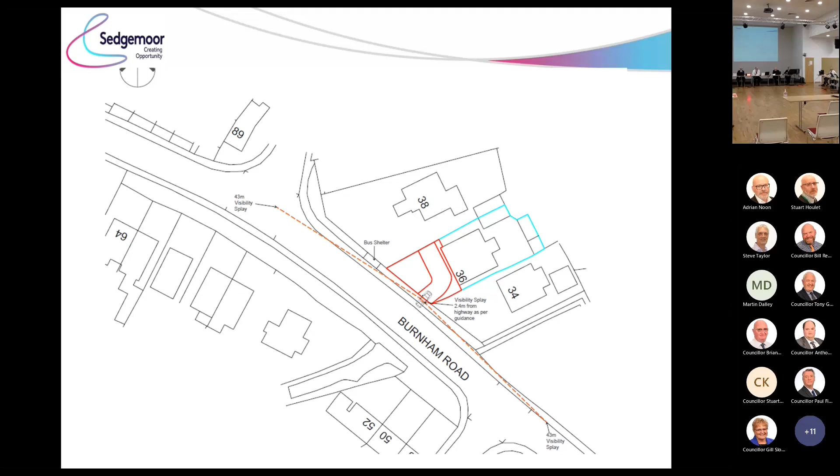There's something I'd like to sort of generally say about this particular site. The bungalows in this area all faced towards Old Burnham Road. That was the front entrance of the bungalow, and the back entrance was always the bedroom. And it looks like from the road that the developer has developed this bungalow, this small bungalow, to the side and to the front to make it into a front-facing house. I think the reasons why they made it facing onto Old Burnham Road in the first place is because the road was quite a busy road. And what they've done is they've converted the garden into the front part of the house.

I would say that there is absolutely no chance whatsoever to have a bell-mouth entrance, regardless of what our previous person said and the presentation person said. It's just not possible. The entrance is narrow. It will come straight out onto a verge. It is also not possible to have 43 meters of direct sight past the bus shelter. It's just not possible. And you have the very busy, and now they've told us it's a 30-mile-an-hour limit.

Sometimes you have traffic flying through the give-way roundabout when there is no traffic line. But at certain times in the day, the traffic is so busy that it's jammed right up to the end, and this will stop them coming out and going in. They propose to put a caravan in there, and I think that coming out of that very narrow entrance will be quite a difficult stunt.

Recently, I was visiting the Co-op, which is only a few yards up the road and has provided more traffic on the road, especially traffic coming out of the Morland estate. That is a very, very busy junction of movement. And I witnessed them trying to cut down the branches of the bungalow, because apparently the developer owns, I think, 2 or 3 bungalows in that area.

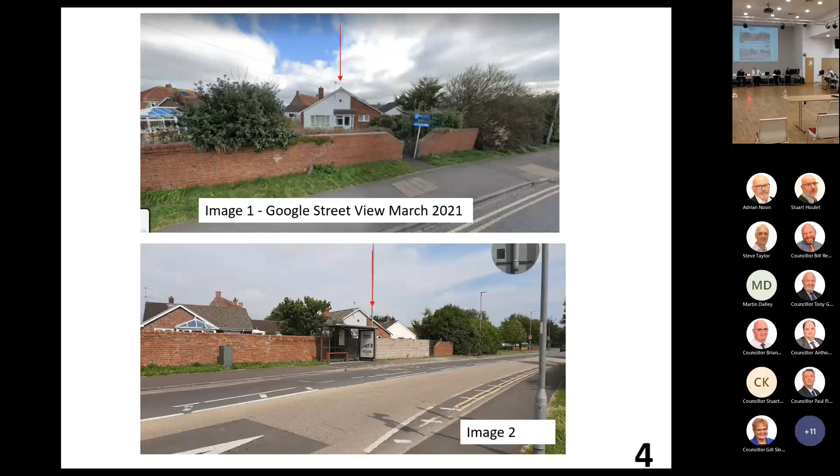This house easily has a parking space at the original front. The access is the alleyway up the Old Burnham Road. And there's no reason why it should be converted into the front space looking out onto the Burnham Road.

The other thing I would point out to you is Sedgemoor District Council's truck had an accident there 2 weeks ago. It's a very busy, accident-prone area. I would suggest that you check on that truck accident, and I don't know what the outcome was, but it was reported to me the other day.

So I have to say that I'm really concerned that this is an accident waiting to happen area, with lack of visibility, lots of pedestrian traffic, lots of mums and toddlers and carriages walking along to go up Pepper Road to the medical centre. This is not really acceptable. And I would say that certainly under policy D14, 13 and 14, which is to do with delivery, this is not essentially a safe highway.

Is it policy? Yeah, policy D13 talks about enhancing road and personal safety, enhancing the facilities for pedestrians and cyclists. I don't think this complies with D13 as sustainable transport and movement, and I think it will cause problems in the future. So I would like to just leave it at that, as much as I could say. Thank you.

Councillor Henry, you indicated again. Thank you, Mr. Chairman. The whole debate on this property is nothing more than access. It's nothing else, that is it. We're not talking about a block of flats or several houses built in a small development whereby that would generate traffic and plenty of it too. It's just one single bungalow, I think, isn't it?

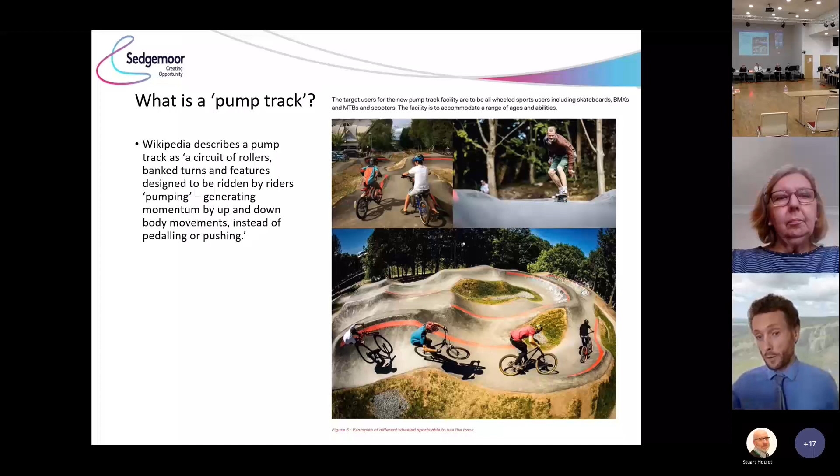I've taken a quote here from Wikipedia - it's a circuit of rollers, banked turns, and features designed to be ridden by riders, primarily on bikes, but other means are certainly possible. The undulations allow riders to use their arms as well as their legs to generate forward movement. It's not just a lower body workout, but also upper body. That's why it's called a pump - because you can pump down with your arms as you go over the undulations. That's how it gets its name.

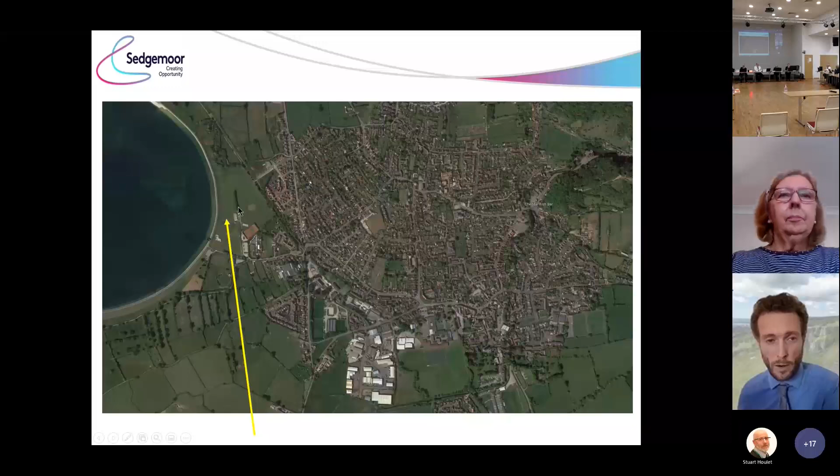The location we're talking about is at Sharpham Road playing field. The playing fields are all located in this area, just on the edge of Cheddar Reservoir - a very popular area with an existing number of sporting and recreational facilities. The primary recreational facilities for Cheddar are all located in this area.

The red line of the application site is shown here. The pump track is all contained within this area, in amongst some of the other sporting provision, which I'll go through shortly. This is just the block plan showing the layout - it's a circuitous track that winds in around itself.

I'll show you these topographical images in a minute, but there are areas of hard standing between some grassed areas. You get this upper rest area, which is part of the feature where riders can take breaks between circuits - almost like a social aspect of it, with a lead-in path.

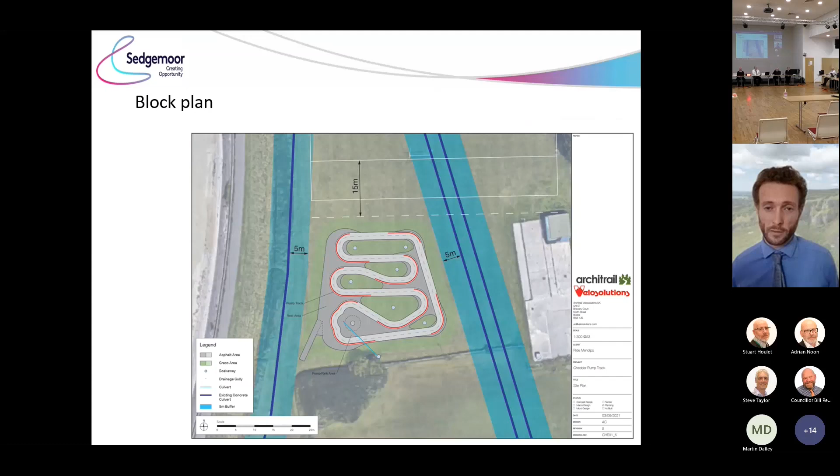These lined coloured strips down the side relate to buffers of existing pipes underneath, and that is part of why the application is in front of us today. The site previously had permission in 2010 to be located 75 metres to the south, adjoining where the skateboard track currently is. But because of the distance of the pipes, which came to light after permission was granted, and because of an easement that Bristol Water have over those pipes, they've had to relocate the track slightly to avoid those, and this revised scheme seeks to achieve that.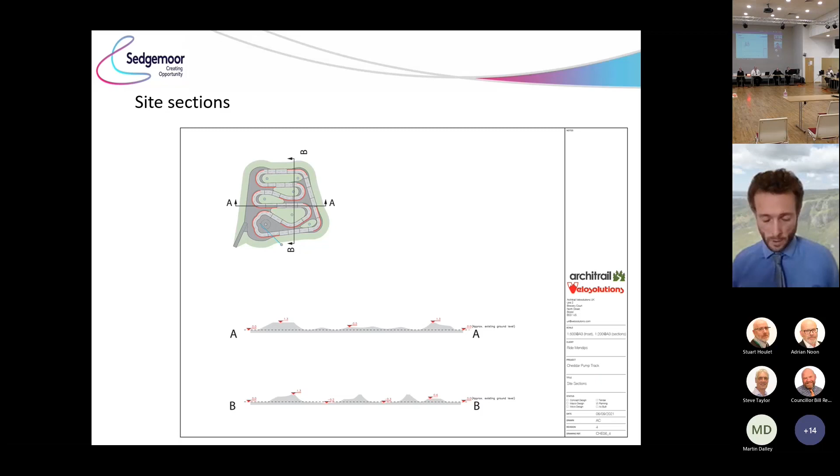Just drainage, so the little dots represent soakaway locations, which will be within the confines of the track. There'll be those lower points, and soakaways will be constructed there, because the water is effectively going to be channeled towards those as part of the scheme anyway.

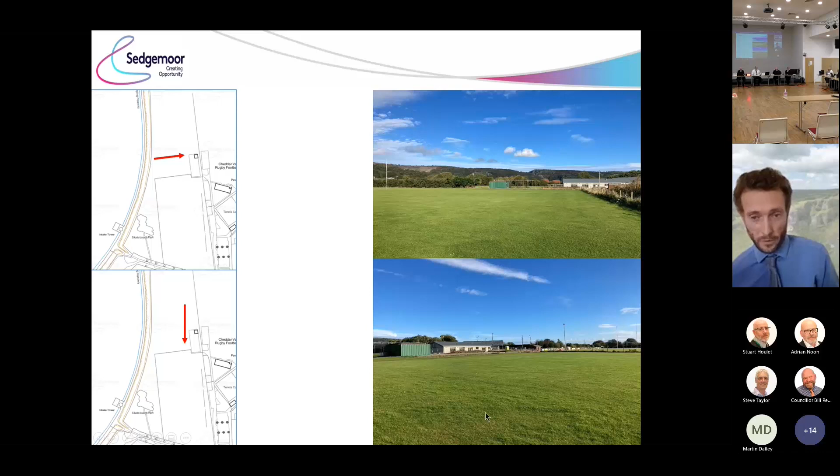Just some photographs of the site to get a flavour of it. So it's an existing green area between existing pitches at the moment, with rugby pitch to the north and rugby pitch to the south. It's a flat, open area of grass that isn't put to a specific use, very open and flat, but with existing facilities in and around.

You can see existing buildings associated with some of the other sporting provisions at the site, and some of the rugby pitch goals with the pitch heading off in that direction. So it's flat, it's open at the moment. Yes, there will be development here, and yes, it will involve building up some of these banked turns, etc. So there will be some visual change arising from the proposal.

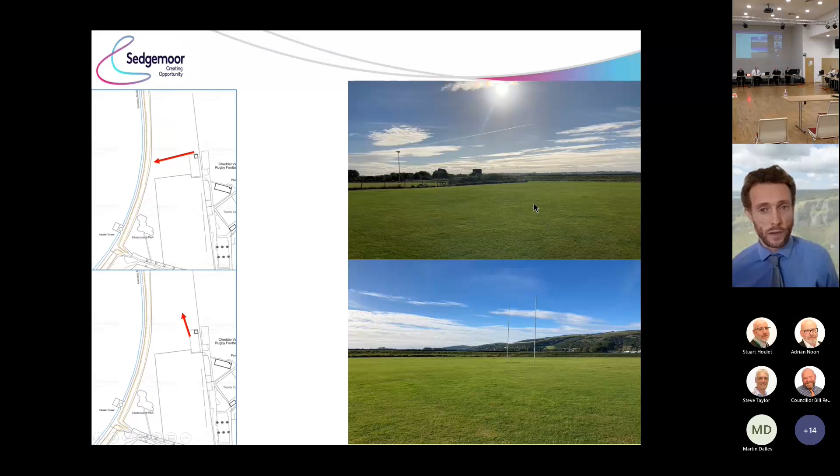As I said, it's the second application for a pump track. We've had one previously that was granted permission in 2020, 75 metres to the south, and this one is here to avoid the Bristol water pipe, which affected the previous proposal.

So just as a quick update in terms of the report, before we go through the main body of the issues.

One additional representation has risen to two effectively since this presentation was done. I had one very late one as well, raising the same issues: that they understood a contract with Sedgemoor District Council would preclude the proposed use. Sedgemoor District Council owns the land, but it's leased by Cheddar Parish Council. There's concern about the tarmac to be constructed and the large earthworks, that they're not fit for the intended use, and that it's too close to the rugby goals. They expressed surprise at Cheddar Parish Council and the rugby club's support for the proposal, saying they would support a different location, and that it would be used by a range of ages with very young children vulnerable to injury.

That captures some of the tone of the recent two objections we've had. I don't want to go into detail on the numbers of representations, but clearly there's a significant volume of local support in terms of representations from individuals, local organisations and schools. We do have those objections, and the proposal is in front of us because of the objection of the ward member. The parish council, however, are supportive of the proposal.

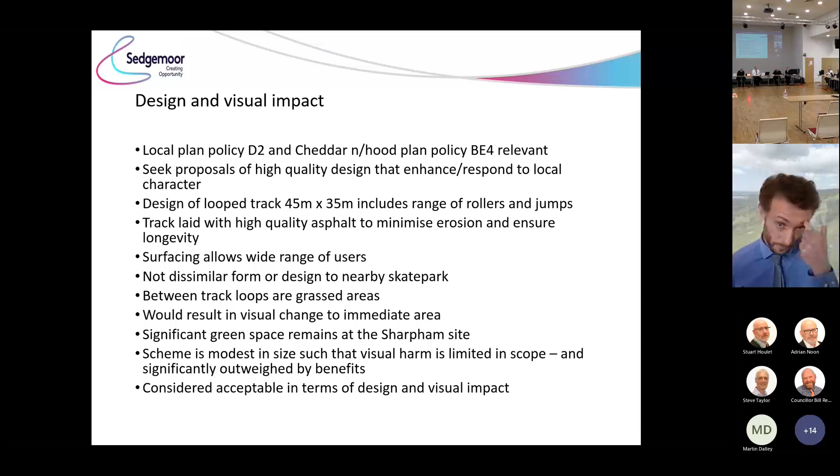The revised location is also acceptable to Bristol Water, given the proximity of their pipes, and they haven't raised any objection to the proposal. So the principle of development, therefore, when you take into account those factors - the views of Sport England, local and neighbourhood plan policy - is considered to be acceptable. In terms of design, we've got local plan policies and Cheddar neighbourhood plan policies.

They seek high quality design which responds to local character. As I stated, it's a loop track, about 45 metres by 35, with a range of rollers and jumps. The track is going to be laid with high quality asphalt, so that's a fixed surface, not a loose gravelly surface.

That's done for a couple of reasons: to minimise its erosion and ensure its longevity, but it also allows a wider range of users - things like scooters or skateboards can go on it because it's well surfaced. If it was gravelly, those users with much smaller wheels would find it very difficult to use. So actually it has a broader appeal because of that type of surfacing.

Appreciate that's a slightly harder type of surfacing visually. It's not dissimilar, though, in form to the nearby skate park, which has that kind of hard surface throughout. There are grassed areas in between, so it's not an exclusive area of hard surfacing throughout.

It is going to result in some visual change to the immediate area - you can see the earthworks are all built up to create some of the banks and rollers. So that's not to negate that, but we are talking about a site within a very large area of existing green space, and those other pitches will remain, retaining a significant degree of green space at the Sharpham site. This will only affect a modestly sized area of the overall provision, so any visual harm that arises will be relatively limited in scope, in our opinion.

This is the application site as viewed from the existing access gate. As you can see, the site is fairly overgrown since its use ceased as a car park. The buildings themselves will be situated one to the northern boundary of the site and one to the southern boundary, and as you can see, there's plenty of space within the site to accommodate the two buildings.

This is a view from the access looking towards the south, to give you an indication of the existing tree planting within proximity of the site. It's not felt that the buildings themselves will have any visual impact on the village or surrounding area, given their tucked away location and the surrounding screening that the boundaries currently have. This will remain unaffected by the proposed development.

This is a further shot looking towards the west of the site, again showing the tree planting within and beyond the application site.

This is a view from within the site looking back towards the access road. There's a small minibus parked at the location of the clock tower itself, and this is where the existing business operates from. So there's a fairly short distance between the site and the existing premises, meaning there will be a functional need and link between the two in terms of daily use.

Beyond here are the existing school buildings and a pond, all of which will remain unaffected by the development. There will be no overlooking or overshadowing caused by the buildings, given their distance from existing residential properties, and there's sufficient distance to maintain existing residential amenity levels.

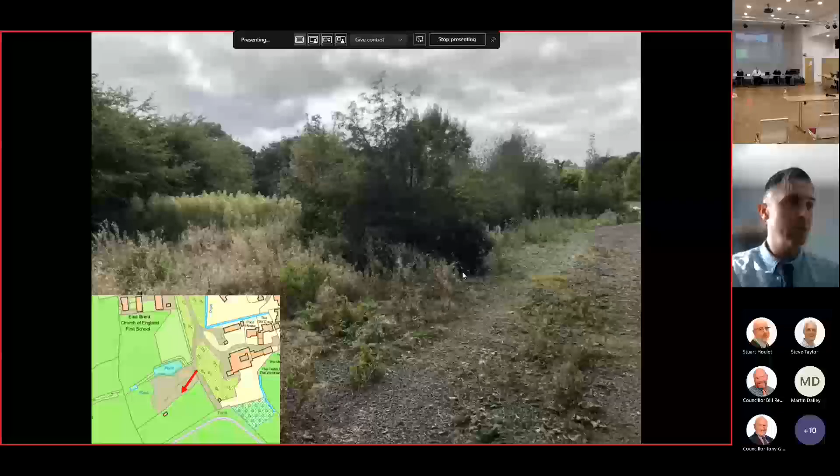In terms of the details regarding supply of water, treatment, etc., it's not considered that there will be any significant impact on existing water quality in the area. The area itself is fairly porous in terms of existing materials, which will be retained, so the roofs will not result in a discharge of excessive surface water. This can be contained within the site, and there is quite a lot of green space that will absorb any slight increase. Given the size of the site and the small footprint of the buildings, there will not be excessive surface water affecting the amenity of nearby properties.

On the basis of the proposal submitted and the acceptability of the design, scale and impact on the surrounding area, it is considered the proposal for the two buildings is acceptable and is recommended for approval. Thank you.

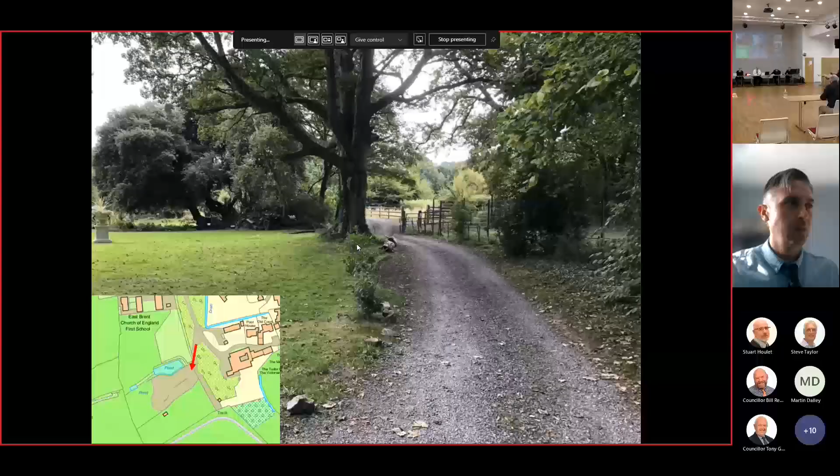The Parish Council reviewed the application and noted that the meeting room would be used on some occasions for activities of persons with learning disabilities. Nowhere in the application does it state that facilities, i.e. toilets, wouldn't be provided within these buildings and that applicants' activities would have to go back to the main house. It was therefore the Parish Council's view that if you complied with the current DDA Act 1995, 2005 and 2010, together with the building regulations, Part M 2010 Volume 2, you would require toilets within that space, especially within the meeting room.

The gross external area is stated at the moment at 51 square metres, but if you look at a DDA compliant toilet, it's 3.3 square metres. The Parish Council's pure concern was that when somebody starts to lay out the internal space for the meeting room, it's found that it can't accommodate kitchens, places for hanging coats, or compliant DDA toilets, and that the external envelope would grow, so the building would get larger.

The other facility, the groundsman hut, is actually a place of work, and under the place of work requirements, it would require a toilet facility and somewhere to make tea and coffee. So once again, that space could grow.

The final comment was that Wessex Water have said they've got no comment because there is no water supply and no sewage disposal. But if it's found that compliance with the Workplace Act and DDA requires toilets, then Wessex Water would have to re-comment. Our concern as the Parish Council was: if this could be deferred and the applicant confirms there are no requirements for toilets, and that any use of that building will go back to the clock tower, and that the footprints of these buildings will not increase, then that would be a different consideration for the Parish Council. Thank you, Mr. Chairman.

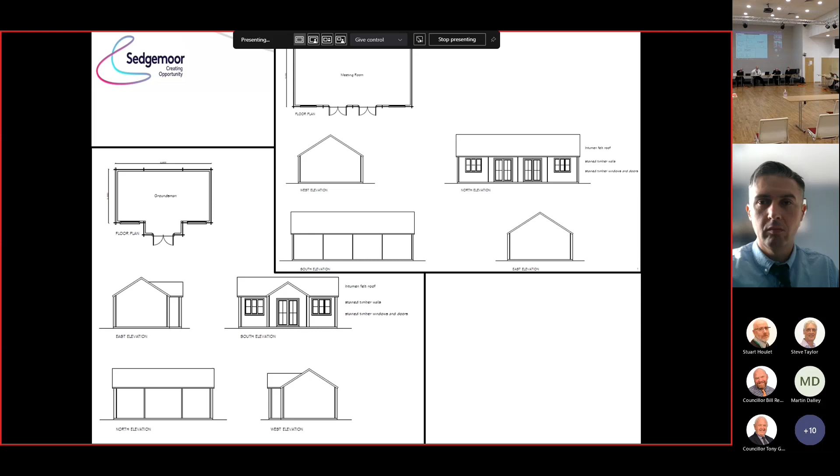Thank you, Chairman. In terms of the existing car parking area, there is quite a lot of ground still left within the existing parking area that was the former school car parking area. Based on the size of the buildings, it's not considered that the parking itself would be in excess of capacity.

First, would this building be inspected under building regulations, quality control?

I know there is a minimum footprint requirement for detached outbuildings for them to come under building regs. Offhand, I'm not sure what that cap is, but I would suspect it's of a footprint that would probably require building regs.

So that would mean the physical visit of an officer to inspect. I'm just reassuring Mr. Bray, in case anything's done which they've not got permission for, that we'd be aware of it. That's my angle I'm coming from, Chairman.

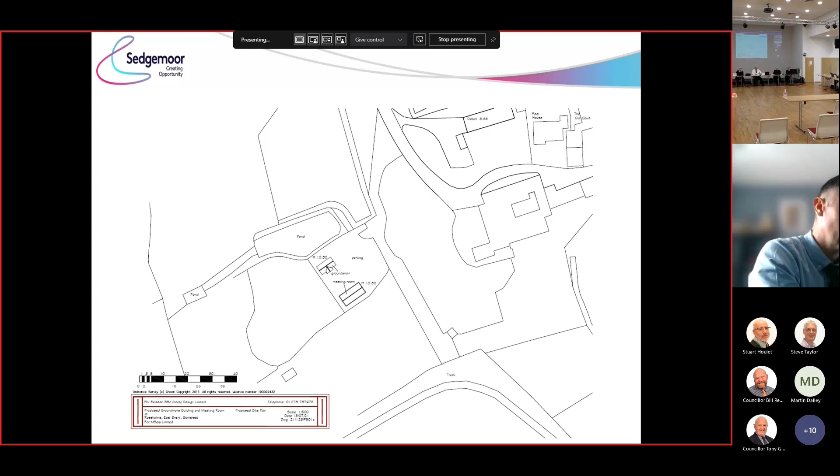Right, members, that brings us to the end of the applications we have before us today. But if you can move in your papers to page, I believe it's 91. Mrs. DeVries, I think you're going to take us through the reports.

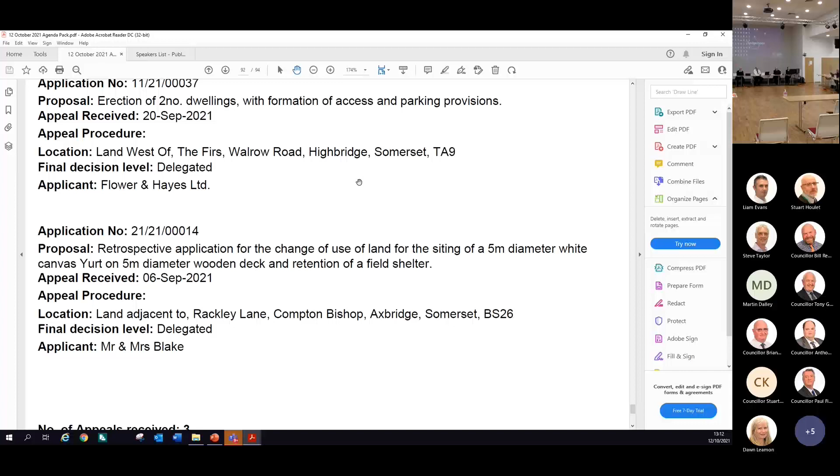And there was a retrospective application for change of use of the land for siting of a 5-metre yurt on a 5-metre wooden deck and retention of a field shelter at land adjacent Rackley Lane, Compton Bishop, and that one's currently at appeal as well.

Any comments or questions? Councillor Kingham: The Flower and Hayes site at Walrow, they have actually started moving earth, so they've obviously started on site. Officer: Yeah, they've submitted a lot of discharge of conditions in connection with the appeal consent, so we've been discharging all the pre-commencement conditions and they have started work.

If there's no further comments, we'll move to 6.2 on page 92. This is section 106 agreements that have gone out. There's Brent House Farm, which was an outline application for the erection of an agricultural workers dwelling, tying it to be an agricultural workers dwelling as part of the 106. That one's finally been issued.

Lakeside, which was at committee, was outline for up to 110 dwellings - that one finally has gone out as well. And Brent House Farm, another application for an agricultural workers dwelling - two applications for the same site, an outline consent and a detailed consent, and it's an either/or on the consent, so the one legal agreement covers both planning applications.

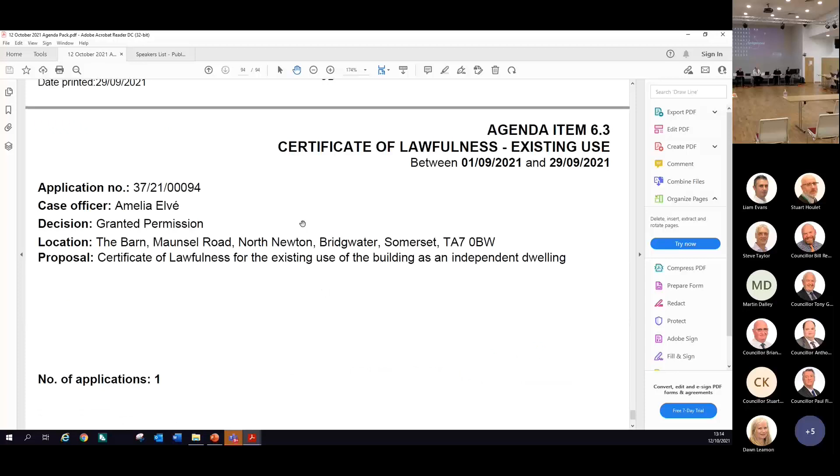Not seeing any, so that takes us to 6.3 and the certificates of lawfulness. This one was at the barn on Maunsel Road in North Newton, and it was a lawful development certificate for the existing use of the building as an independent dwelling. They'd proved that they'd occupied it as a residential property for over 4 years, and it becomes lawful through passage of time.